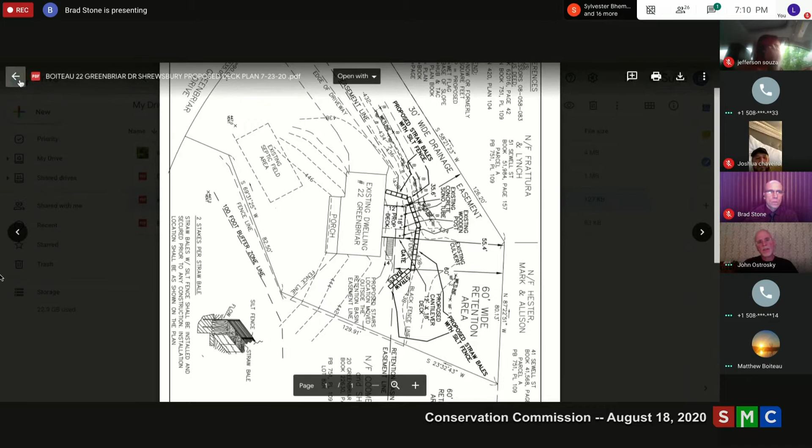Okay, and Brad's put up a plan here, sort of small on the scale. How close is it to the nearest wetland line? Can you tell? It's more than 30 feet. It's within that range. I'm not exactly sure what he had marked out back there. Oh, there you go, that's good. Yeah, there's that, that's a good shot right there. Yeah.

All right, let's go to some questions. Martha? So as John had asked before, the sonotubes aren't changing. You're going to just increase the size of the deck, but use the same ground support. Correct. Okay, that's my question. Thank you. Jason?

I'm all set. Bob? My only question is I'd like to pin down how close it is to the resource area. Brad, you may, I don't know if you have information about that, but it doesn't look to be 30 feet. I don't think it's 30. Let me just pull the plan back up again. Yeah, I wasn't sure if it was that 30 number. I'm just not, from what I was told, it's within a reasonable range.

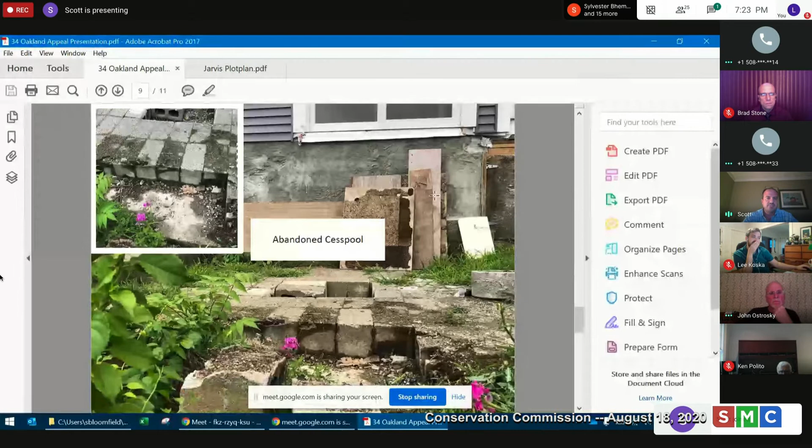So this is the back of the house. You can see the egress is here. There's 2 sliding doors that were here. This is the cesspool right here, and it extends out 11 feet, 6 inches, I think 6 or 7 inches, from the back of the house.

So the proposal is just to put the footings on the other side of that cesspool so it doesn't disturb it at all, and it stays there. You can see this is kind of the inlet picture here, where that cesspool is located. That's all been filled in - you can see the pea stone and the gravel there, filled in in favor of the E-One pump that's installed.

Now Scott, you were saying you can't put the deck footings on the cesspool area. What would be, I mean, if it's filled in with gravel, why would that be true? The building department said that I would need to, it'd have to go out, we'd have to dig down and put the footings inside of the gravel area, so you can't dig it out, it'll all have to be dug out. Okay, I don't think digging the cesspool is something anyone wants to do.

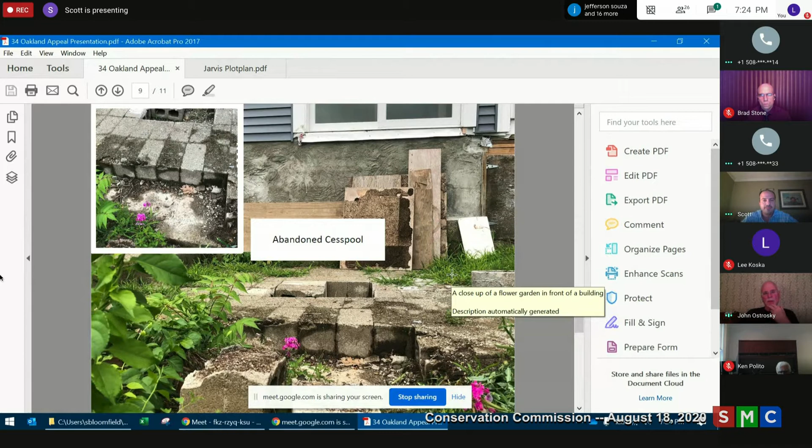And that's why you can't. Oh, you didn't pump it out ahead of time? No, it was pumped out, but it's a cesspool. I mean, it wasn't - I had it all inspected and they looked at it and we filled it all in. So it was all pumped out and everything, but it was still a cesspool.

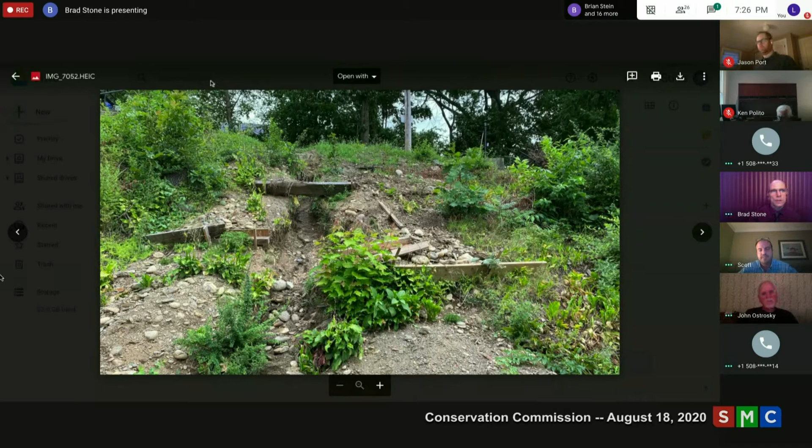Yes, I do. There's actually, they're going to put the rock walls in there. So what happened was when the trench was dug, when they filled it back in, there was a rainstorm that actually washed a lot out, so that all has to be put in. We're going to put two walls - there's going to be one up near the road to stabilize that, it's going to be less than four feet, so it doesn't have to be engineered. And then there's going to be one further down, and then what we're going to do is plant footing, like different shrubbery in there that's going to retain that ground that's in between the two walls. So that's the plan there.

Totally agree, this house when we bought it was really rough shape, and so we've been slowly chipping away, and that's actually in process right now, starting to look at that.

When was that photo recent? Yes, hold on one second, make sure. Yep, so that photo was taken earlier this month, sometime after I get your application. Perfect. Yeah, so within the next, I have a hard masonry place coming, actually looking at that, and they're going to put the rock walls in there and cement it and do it all and put the drainage there, so it'll drain.

Can you see what's on the screen, John? Yes. Okay, so Hickory Drive, there's the lot frontage.

This is all wetland through here. I believe the access, actually you can see it on the plan. Up here towards the top, it says driveway and utility easement. The driveway would be coming from Crimson, so that's why it has a Crimson Street address. That way you don't want to confuse the first responders, so that's why they do it that way. So it's got frontage on Hickory, but its driveway access is through Crimson.

Okay. And I'm sorry, would you mind please going through the plan of work again, because I'm not seeing it on the plan, and so I'm having a hard time following it. I just need to hear it one more time.

Okay, the deck is going to be 11 feet wide by 10 feet out, coming out from the back of the porch, and all the footing is going to be dug by hand, by shovel. Then the steel is going to have like a 30 foot setback from the setback line to the property line. I don't know if you have more questions.

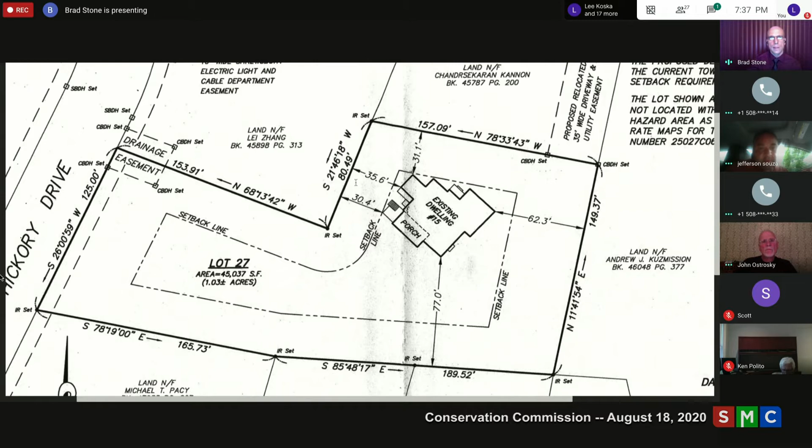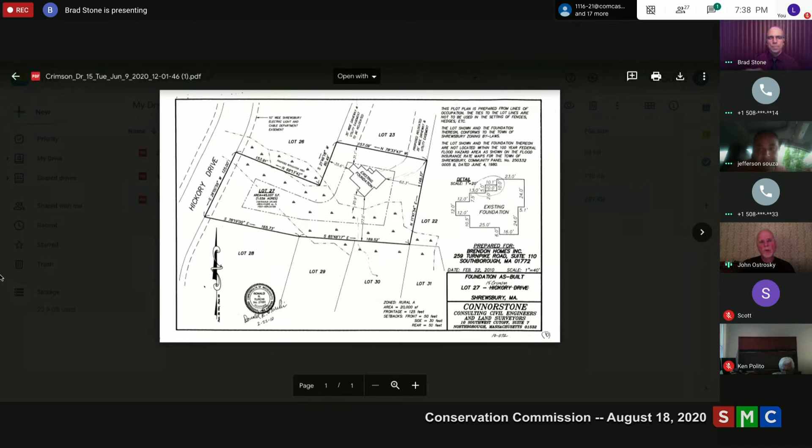Okay, sounds good, Brad. Jason? No questions. Bob? All set. Ken? All set. Brad, you're all set? Yes. Does anyone from the public have any questions or comments on this request for determination?

All right, I don't hear any. We'll close the hearing. Bob, do you want to make a motion? Yes, I'd like to move that we issue a negative determination with respect to this petition. Do we have a second? Second. Okay, all in favor?

We'll do a roll call. Martha? Aye. Jason? Aye. Bob? Aye. Ken? Aye. And John Ostrosky? Aye.

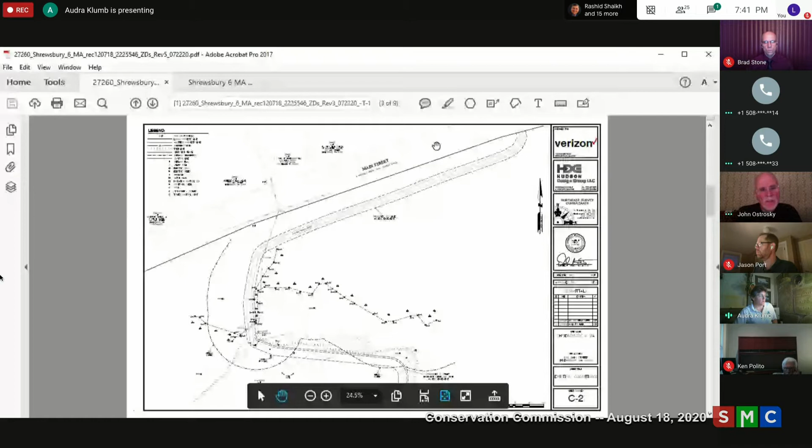Is that any better? No change. Oh, here it comes. Yep, perfect. Okay, good.

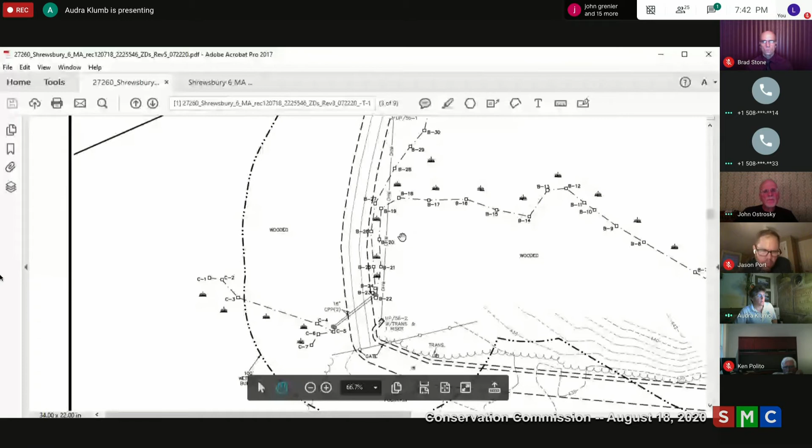At this point, you can see the wetland, the B wetland line is over here. It's wider, farther to the east, and it narrows down to a little channel—not really a channel, but a narrow passageway—before it joins into the culvert, and then crosses under the culvert.

It crosses under the culvert into the C wetland, and then continues westerly. The existing overhead utility line leads to an existing utility pole right here, and the proposal is to replace that pole and have underground utilities along the proposed access road through the field, along the side of the field. You can see the existing tree line there, and the utilities and access drive will follow along it and then turn south to go to the tower site.

We show the wetland buffer as the larger dashed line in this area. The impacts to the buffer will be for the underground utilities at the pole and through here, as well as the access road. Then there's a break, and it hits the buffer again in this area, then leaves the buffer at that point. Then it goes down to the tower site, and we're outside the buffer at that point.

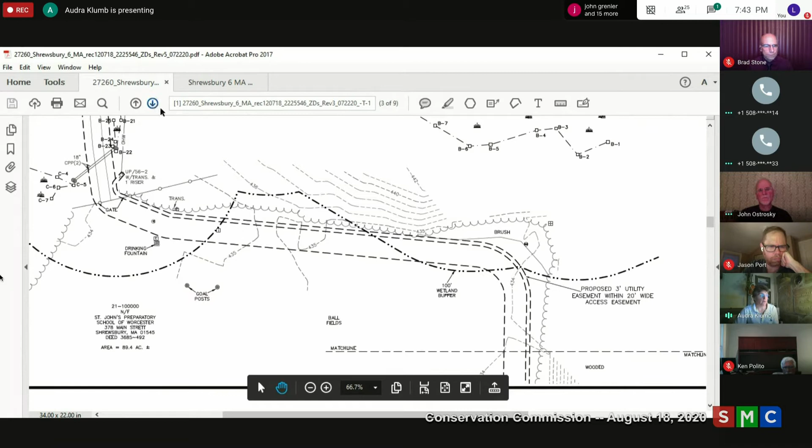I can show some photographs to you if you would like. Let's see. Everything runs a bit slower when I'm running a bunch of operations at once, unfortunately. It doesn't want—there we go.

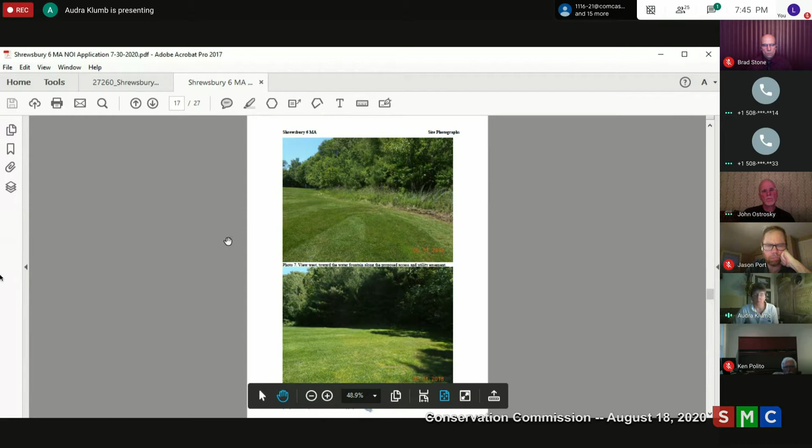That was the wetland section. So do you have any questions?

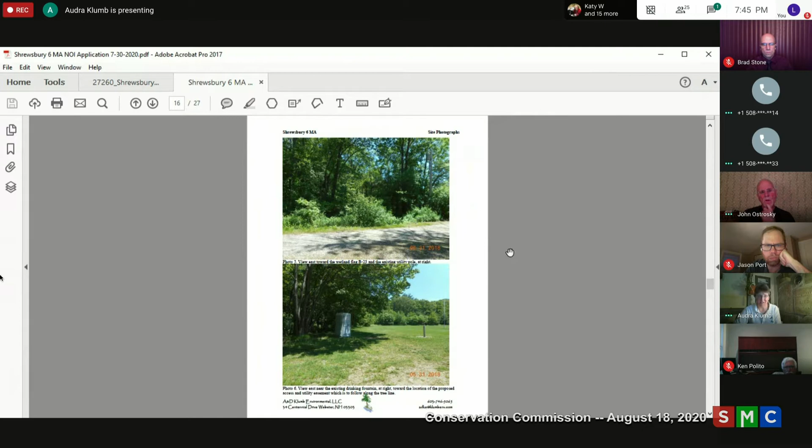Just when you're talking utilities, are you just talking about bringing power to this site with overhead lines? So the utilities would be the power, as well as, I believe, they run the coax through for the backhaul back to the... and I can have other folks speak to that who have more knowledge in that part of it.

Okay, I think we've got a couple of folks here. Dave, are you there? Yes, I'm here, this is Dave Tibnan. I'm the real estate consultant for Verizon Wireless.

So we'll be running both power and fiber from that pole that we're replacing, proposed to be underground all the way to the tower compound. Okay, so from the pole it goes underground. Correct, and it's both power and fiber.

Okay, Martha, do you have any questions? It looks like some of the access road is built—will you be building additional roadway? Yeah, where I show, there's existing access to the field right now, but there's no access road around the field to get to the tower site.

So from once you get onto the field, that will be where the access road is constructed around the north side of the field, then the east side of the field down to the tower site. And what will the surface of the road be? I think it's proposed as gravel. Gravel, okay. And when you're installing the utilities close to the tree line, how close to the tree line are you going?

This is Dave Tibnan again. I don't know if Jose is on the line.

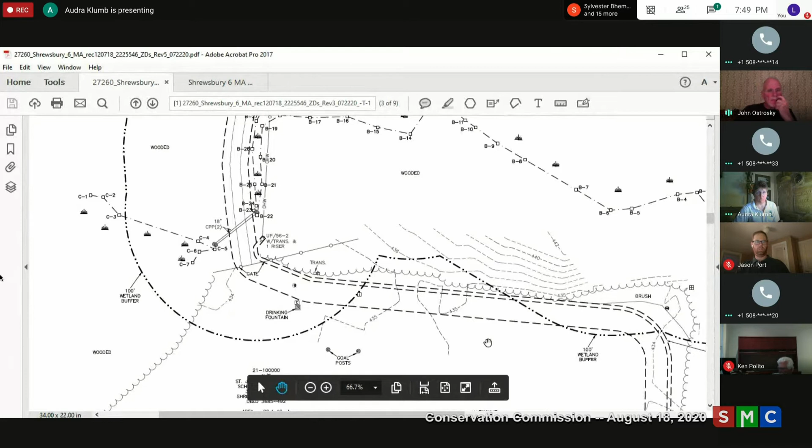My questions have been answered. Okay, yeah, I've got a question on that road again. We talked about the gravel road initially, then went over to the grass, using the grass surface. Once a month access, what happens in the winter and spring when you have less than favorable ground conditions? What kind of vehicles are you bringing in there to check this, or would you be walking in at that point?

I'm not sure what kind of equipment you need. The cell techs do drive four-wheel drives, but they'd be hiking it. I believe that gate's going to be locked and closed once the site's built. A lot of the newer sites Verizon Wireless is now constructing, most of the upgrades are actually done remotely, and they're also monitored remotely. So the site visits, which used to be once a month, will probably be much less common going forward with a newer site like this — it might really be once every 6 months, is what I should have said.

Okay, and they could walk in if conditions are unfavorable, it sounds like. Absolutely, we have sites that are on mountains with limited access — no access whatsoever in the winter. Right, and what kind of height are we talking about for this tower?

We haven't gone to the planning board yet, but we're proposing 120 feet high. Okay, because you're pretty much at the bottom of the hill at that point, so you don't gain any natural elevation with that location. True, but that 120 feet will still work for them then. That's correct. I'm not an RF engineer, but height's not everything.

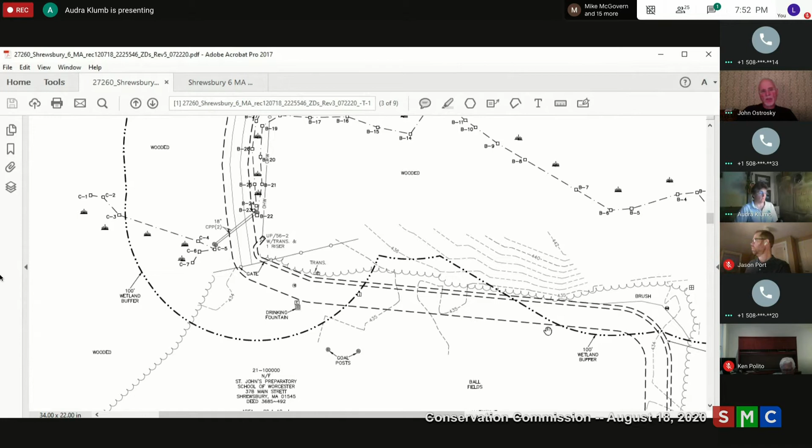Oh, okay. All right. The actual building for the tower must have some structure to house some of the equipment — just out of curiosity, I know that's not in the buffer zone. It doesn't look like it from the plan, it looks like it's out of the buffer zone.

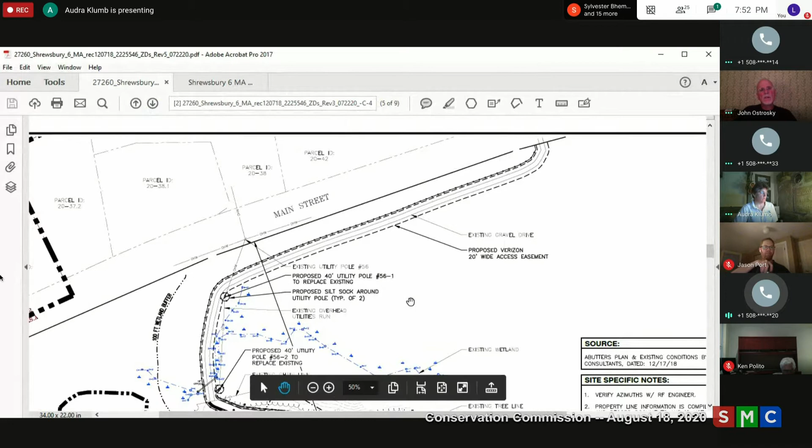What size and type of building do you guys usually have for this kind of installation? Our newer macro sites just have outdoor cabinets that look relatively much like a refrigerator. I think we just... I'm sorry? We have a plan up here but we're losing your audio. Go ahead, Rich, you're clear now. The newer sites generally have outdoor cabinets, so we don't put the buildings like we used to.

Oh, okay. The transformer pad — a transformer pad, perhaps a generator, and some outdoor cabinets which look like refrigerators. Yeah, okay, that's interesting. All right, Brad, do you have any comments?

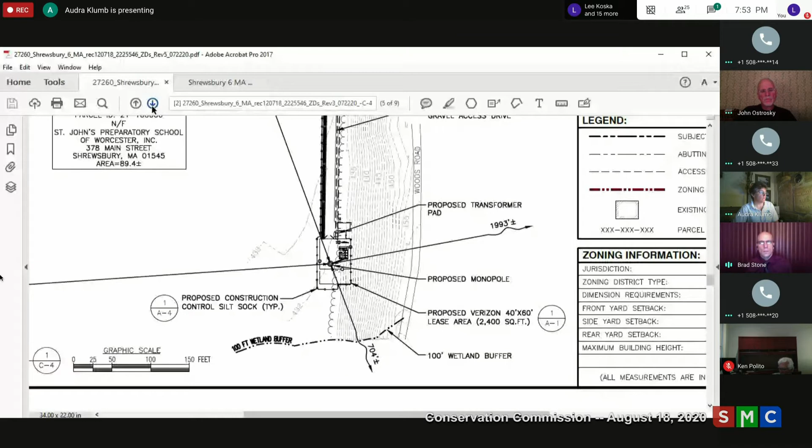So a few things. The first one is I don't think we've received a file number yet from DEP for this. So I would recommend keeping this open until we've got something from them. Because recently we have been getting a lot of comments from them. So it would be helpful before we try to make any decisions that we've at least gotten the file number and comment sheet from them.

The other thing I was going to say is I had not had time to go entirely through the stormwater report. And I do remember looking at the plans and seeing the gravel drive and some of the components like the bioretention swale, things of that nature. What I'm hearing tonight, though, is that it's not going to be a gravel drive. It's going to be grass.

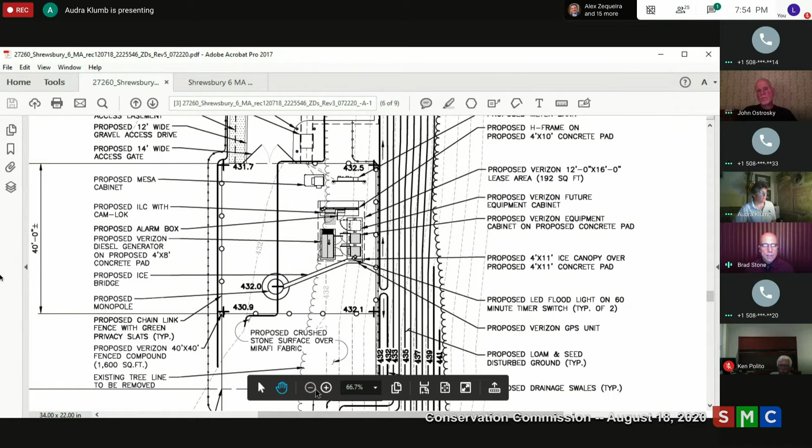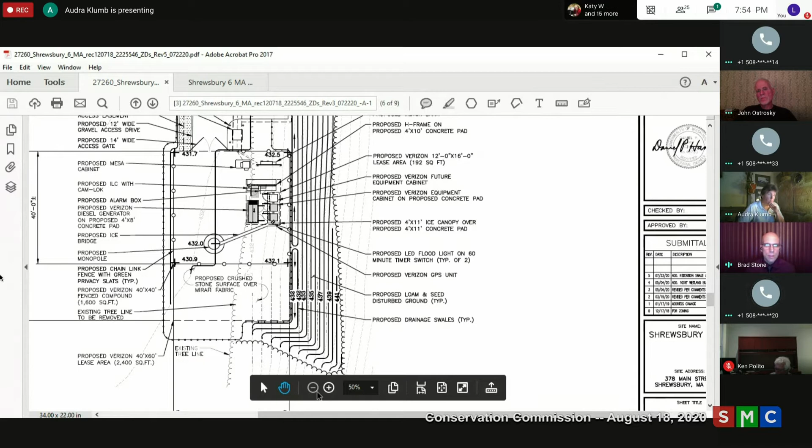What I would suggest is any of the changes from what we have in front of us now, revise the plans and present them to us before the continued hearing, for instance, and that way you could finalize the decision on what you have in front of you. I just don't like to condition something that's not on the plan sheet these days. We're running into problems with that. So if it intends to be grass, it should be shown grass, and then any modifications in addition to that, something that might impact the stormwater report, for instance, should be reflected there as well.

Okay. Other than that, I'm absolutely thrilled that this location compared to, for instance, crossing Westbrook across the street. So I'm much more excited about seeing this here.

Okay, no, that's good. And, great, thank you.

And when those plan revisions get made, you should get them to Brad as soon as you can, prior to the meeting. Will do. And also get it over to DEP too, because they do a co-review, and you don't want them looking at the outdated plan and making comments. That would put us off another month. Yep, we'll do that. Thank you.

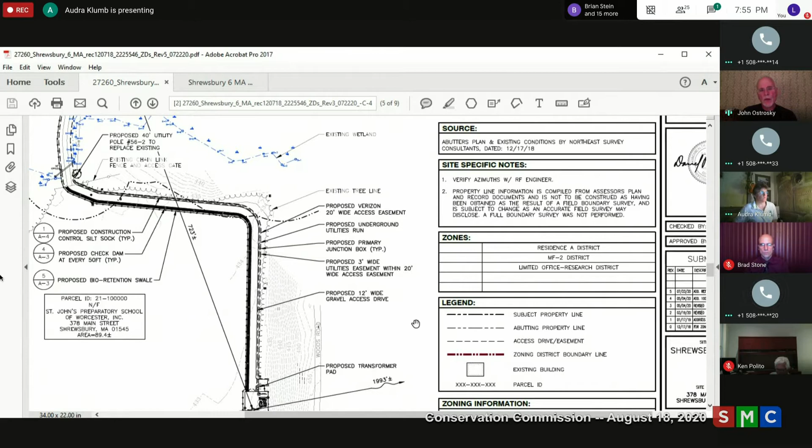All right, let's see if there's anybody in the public with any questions or comments tonight. Do we have any questions or comments from the public? I don't hear any, so we will continue this hearing until our next meeting, which will be September 22.

Okay. Okay. All right. Thank you. We'll see you next month. Thank you. Yep.

Martha, would you please read the notice: Notice is hereby given in accordance with the provisions of General Laws, Chapter 131, Section 40, that 6 Kings Point Drive Realty Trust, 180 Barstow Lane, Tolland, Connecticut, 06084, has filed a notice of intent for the demolition and reconstruction of a single-family house, retaining walls, and associated site work at 6 Kings Point Drive. A public hearing will be held on the above notice at 7 p.m. on Tuesday evening, August 18th, 2020.

All right, John, are you presenting? Yes, I am. Thank you, Mr. Chairman. On behalf of John Salem, I am presenting a notice of intent for, as was stated in the notice, the reconstruction of a new house located at 6 Kings Point Drive. 6 Kings Point is off of South Quinsigamond Ave. It's a peninsula that runs to the south off of South Quinsigamond Ave, and it's the last lot on Kings Point. As it's a peninsula that kind of juts out into the lake. It's a 19,000 square foot lot.

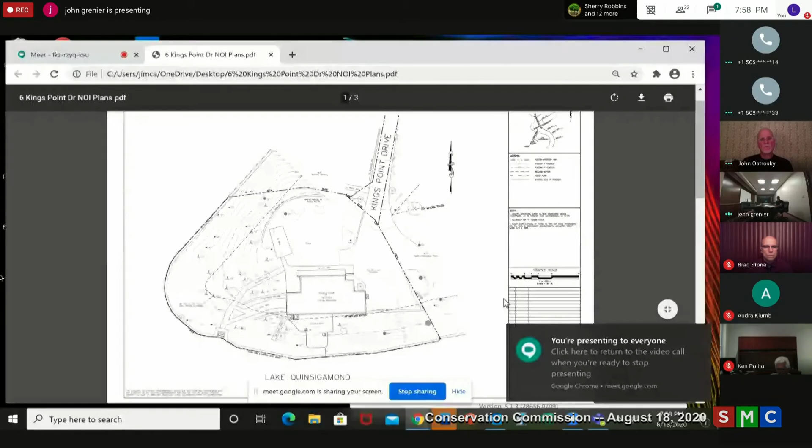I think I can, if I present, I can. Okay, can everybody see that? Not yet. No. It should come up any second now. Let me know when you got it. We don't see anything yet, John. I have to hit share, I believe. Would you like to? Oh, there we go. It was being a little finicky on me. How about now? Yes. Okay, great.

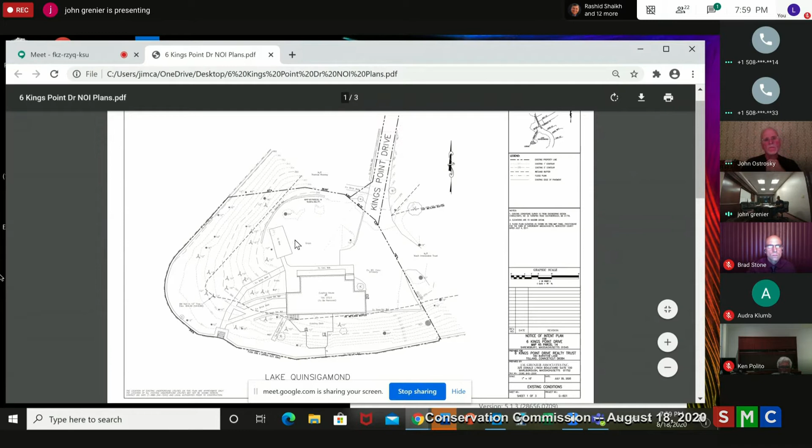Again, this is the southernmost lot on Kings Point Drive. As you can see, it runs like a peninsula out onto Lake Quinsigamond. It's a 19,000 square foot lot. This was the home of John Salem's parents. As you can see, this is where the existing home is on the lot now. There is an existing deck that is at the southerly point of the lot that is right on the lake, and it's about 7 feet. The edge of the structure for the existing deck is about 7 feet off of the edge of the wall on the lake. The existing home is also serviced for sewage just right now by a cesspool. They did extend sewage with force mains onto Kings Point for all of the other lots, and there is a stub located right in this area so that any new home can be tied in.

There's no stormwater management at all on this existing site. Anything that runs off of the existing driveway runs down towards the lake, and anything off of the house runs onto the lake.

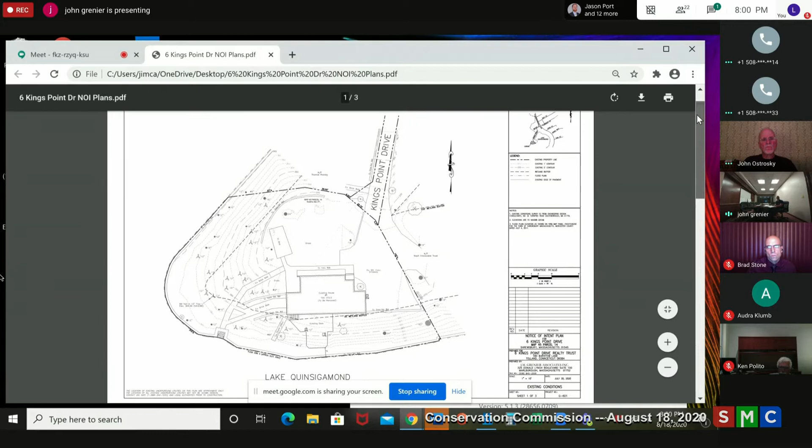So what we are proposing is Mr. Salem is proposing to construct a new home for himself, approximately in the same location as the existing home that was there. It's a non-conforming lot because, as you can see, the shape of it doesn't have adequate frontage. He was also before the zoning board to get relief for offsets for yard setbacks.

A key factor in the location of the new home was trying to maintain similar offsets to the abutting properties. To the north are the Roonies, and to the east are the Knolls. It's fairly tight down there, and everybody can kind of see each other, so he's trying to maintain some of the privacy that is currently there now.

With the new home, access would be off of Kings Point. There's a driveway and parking area located right here, a 2-car garage on the easterly side, and the main house would be located here.

For stormwater management, we would be capturing all of the roof runoff and putting it into a series of recharge chambers — just like every other lot on the lake, it's good sands and gravels. We'd capture the front portion of the roof, putting it into downspouts and recharge chambers in the front yard, with another series in the rear yard. On the easterly side behind the garage, we'd capture a small portion of the garage runoff into another chamber.

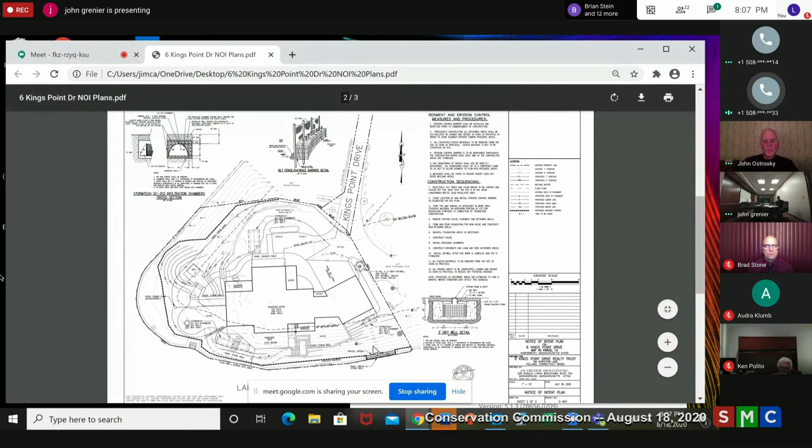So John, I'm always looking at this from the perspective of wildlife accessibility, and this is a significant amount of lake frontage here. Can you tell me more about that gravel apron? You said it would lower the wall, but what would be the final height of the wall in that area?

Well, Martha, originally I was anticipating they were going to remove that section of wall, but in further discussions with my client, he's going to... right now I'd have to look at the elevation of the lake, it's about 358.6, that's the flood zone elevation. The top of the wall is somewhere around 361-ish, so you're looking at about three feet or so. So he'd probably bring that down a couple of feet.

So he's not going to remove the wall. In our further discussions, he's not going to remove the wall, but he is going to lower it just so he doesn't break his back when he tries to bring in the boat lift at the end of the season. So there's going to be a drop in the wall, but he's not going to remove the wall.

Okay, well it would be nice. I like the gravel apron idea, just because it does give some accessibility and it'll be easier for him to get things in and out of there too.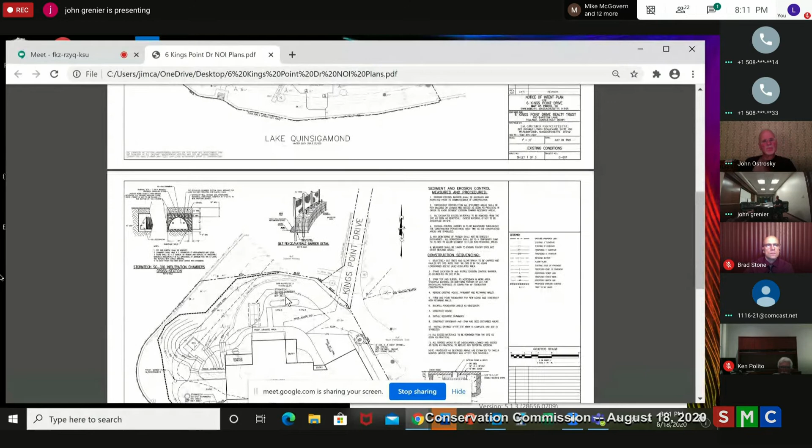So we are reducing the area of the driveway because it's only this area right in here. The footprint of the garage is pretty much in the same area where the paved driveway is, and of course there are some patios and whatnot. So in my estimation there is a bit of an increase, but I don't think it's significant. Again, we're capturing all of the roof runoff between the downspouts and the driveway, and we're recharging all of that into the ground.

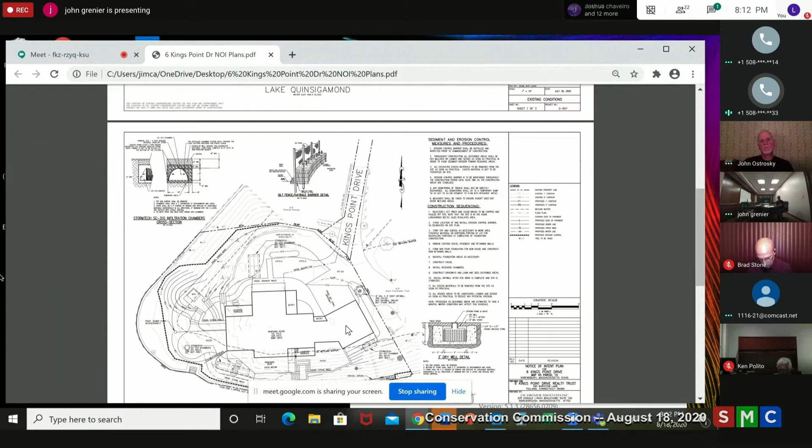Okay, and I was taking a look at your landscaping plan too, and I just want to note that typically I don't see annuals listed on landscaping plans, and you've got some beautiful wave petunias in there, which are not perennials.

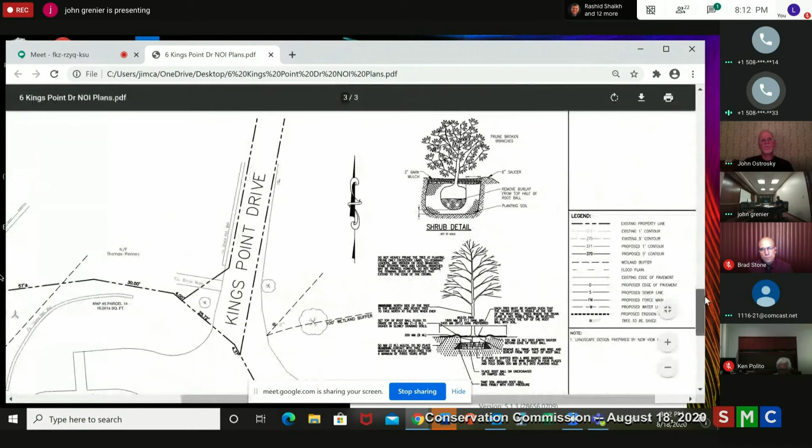So just so nobody's expecting that they're not going to have to plant some more flowers, I've got a list here of plantings that includes 352 plants. My discussion with my landscaper was, is all of this a perennial, coming back every year? So we're only planting once and maintaining.

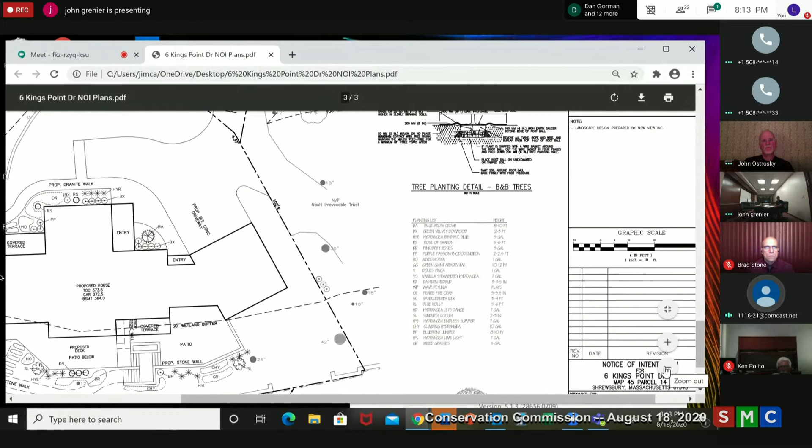But I think what her point is, the wave petunias might be annuals. Oh, there may be some, but this is going to be as low maintenance and as natural a landscaping plan as we can make. Yep, and most of them are that, but just don't expect your petunias to last from one year to the next. You need to talk to my wife on that. I think she knows what I'm talking about. Yep, understood, she does.

All right, thank you, I'm all set. Jason? I don't really have a question at this moment.

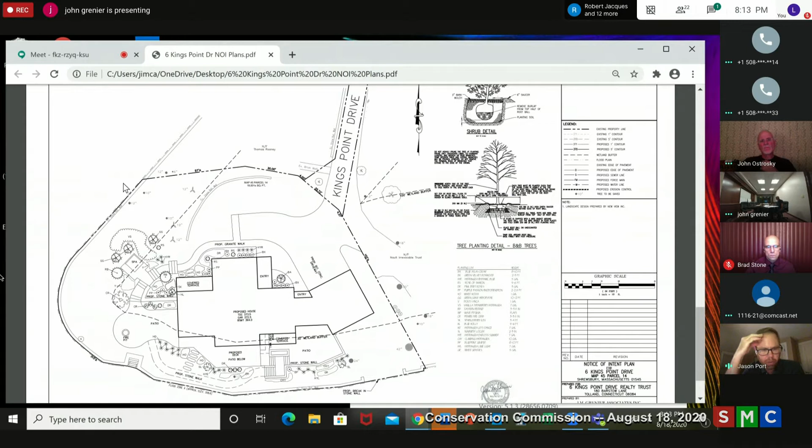More of a concern, somewhat following up on Martha's question, the amount of impermeable surfaces. I don't know if, John, I understand what you're saying, but I don't think it's a slight increase looking at the plan. I am generally concerned about the amount of work within the buffer, including, I don't know how many square feet of the house is going to be sitting in the buffer, but I have a general concern about the amount of work that's going to take place in the buffer and the house being in the buffer.

But we shall see what other members have to say. Do you have a question, Jason? No, I have no question.

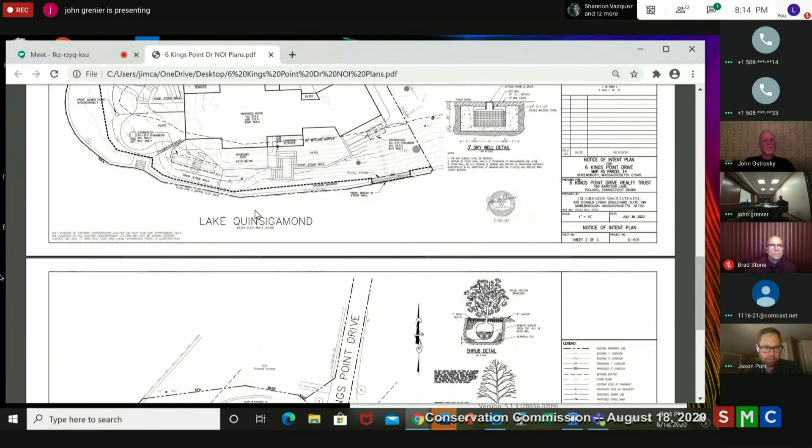Here's, if I could add to this: this house was built in 1964, and there are no rain gutters, no sewer. You're talking gravel bank and pea stone at a fairly steep grade. This is the existing house that drains down basically to the water. What we are going to do, with your permission, is manage all the stormwater. We're actually lowering the grade significantly of these gravel banks and planting — we have a significant landscaping plan to capture and prevent all this water drain off. When you look at where we're going from and to where we're going, it's going to be a big improvement.

There are going to be some concerns, but we've got a builder who is highly reputable, and we're going to do everything to abate any kind of runoff or water during the construction process. John can grant you that. And I appreciate what you're saying, I do.

However, you're still building a very large house and doing a lot of work within the buffer zone. So while I appreciate you saying you're cleaning up the site and mitigating some runoff, you could do all that without building a house that goes within the 30-foot buffer. We're building out all these patios. Again, I don't have a question, I'm just generally speaking of a concern that you're doing a whole lot of work within the buffer and placing your new house in the buffer.

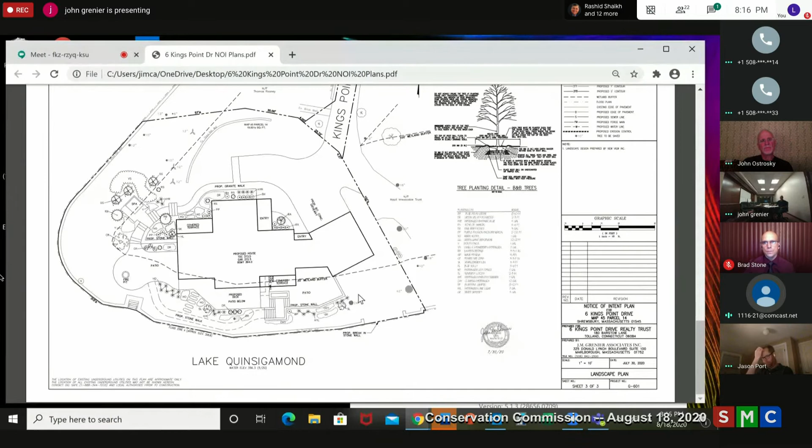Mike, are you on? Mike McGovern, I don't know if you want to comment about that. We can't push it if we go into the buffer. Yeah, I mean, I could certainly address the way I addressed this with zoning when they approved this plan, as to why the house is located where it is.

If this would help, Jason, could I address why the house is located where it is? Well, you can, but it's still not going to address my concern, right? The concerns of zoning are not the concerns of the Conservation Commission. They're completely different. So Jason, let me just jump in here for a second.

I think I hear what you're saying — you're more concerned about the overall size of the new construction versus the replacement. The old house was significantly smaller, you're saying, in terms of disturbance to that peninsula. Well, yes, I think, John, that is a very fair point.

I think the amount of work within the buffer and the placement of these additional structures, impermeable or not, within the buffer, and the house now in the buffer, is a sizable disturbance across the entire peninsula. Again, I appreciate what the owners are trying to do by cleaning up the runoff, but this is a sizable project, and a good chunk of it is taking place in the buffer.

John, Mike McGovern, I was asked to comment. Go ahead. I do agree there are sizable impacts, but there's a lot of pre-existing conditions to consider.

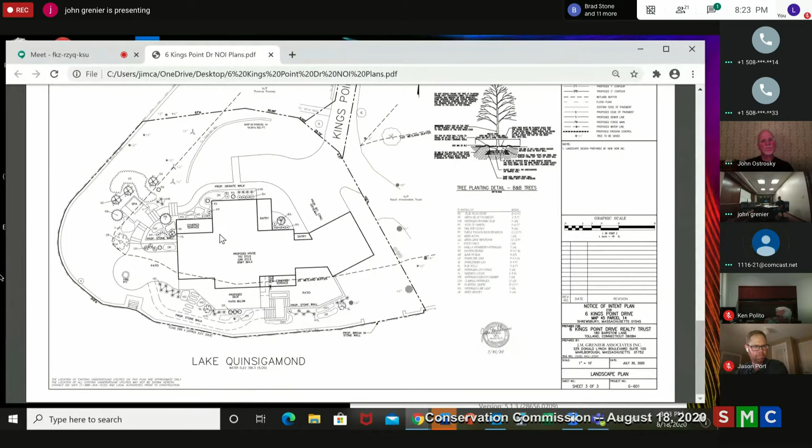I'd like to briefly address the size and design of the house. Just to reiterate, we are moving the existing deck back about 7 feet, so at the point closest to the water, we're actually moving the house back about 6 or 7 feet. A lot of planning over the past year has gone into the design of this house, and the reason it's placed where it is - slightly over the setback in some areas - is because we're trying to compromise here.

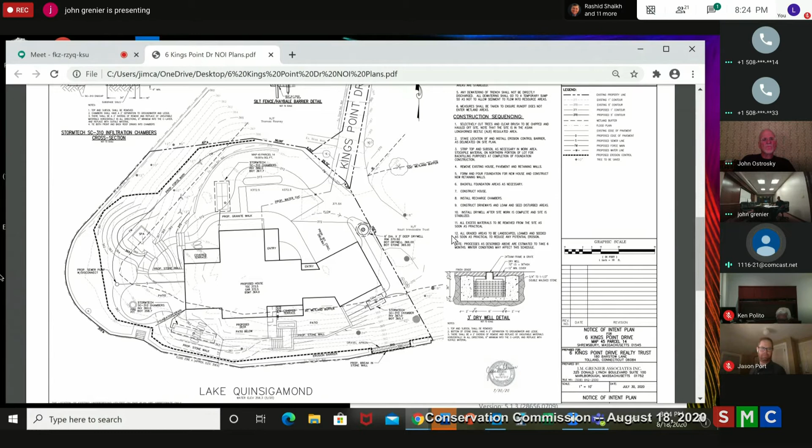We're moving some of the farthest points closest to the water back, trying to come up with a plan that works with all the neighbors. If we move the house to the north or northwest, we would be in the setback with the garage, in the setback to the neighbors to the east and north. And if we move the house further back to the north, you have to understand the terrain - the house to the north of us, the Rooney's, is another non-conforming lot that is right on top of my property line. In some instances their house is 4 feet from my property line.

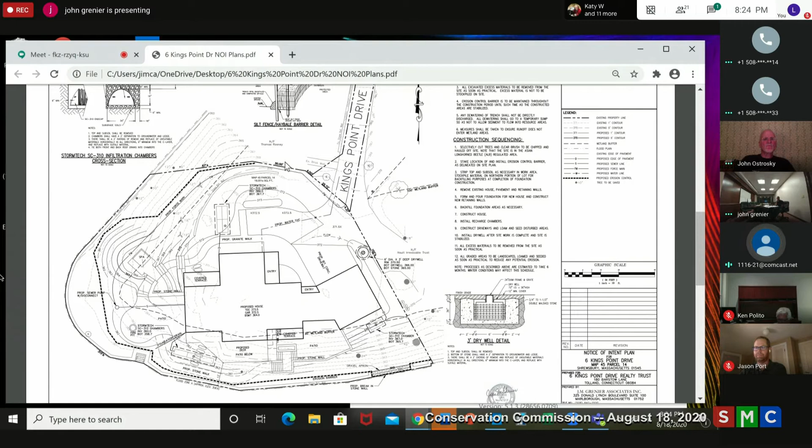So if we move the house to the north, our house is elevated and their house is lower, and we would be looking right down into their patio area. We want to maintain a green buffer between the two houses. We want to maintain some privacy, and that's why you see a couple of areas in the south outline going over the setback area.

The other thing we wanted to keep in mind is the house has an elevator, and by having the addition to the west, the elevator brings us down to the lower floor and gives me better access to the lake. As years go on, that elevator and access to the waterfront from the southwest would allow me, with any troubles walking, to still get there. So that's kind of why we set it where it was.

If you looked at the lot, you would notice that any movement to the north would eliminate a green buffer between us and the Rooneys to the north, and also eliminate any privacy, where I'd be looking right down on their patio. Again, you've got two non-conforming lots, and the non-conforming lot to the north is much closer to the property line than I am to the property lines with any of my proposed plans.

Thank you. Any questions? Ken, are you all set? Yes, I'm all set, thanks. Okay, Brad?

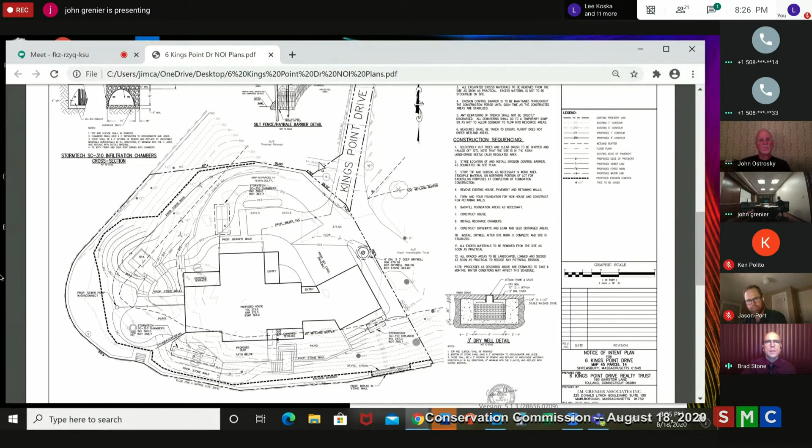Can you hear me, John? Yep. Okay, so just a few things. First of all, this is another project that we don't have a DEP file number for yet, so I would caution not to close this one tonight for that reason as well. Comments on the plan. John Grenier, can you stop sharing so I can bring something up, please? Oh, sure, thank you. Is that good? Yeah, thank you.

So that should be reflected and updated in the notice of intent if necessary as well. I would want to see really detailed specifications of what's planned to be built for the new wall, as well as how that additional item mentioned would be placed and removed seasonally above the wall. I also want to see details on the other proposed retaining walls. And I believe I heard that the patio was going to be porous, so that detail should be added to the plan as well. Those were really my concerns. I think everybody else has already touched on the 30-foot limit, but other than that, I'm all set.

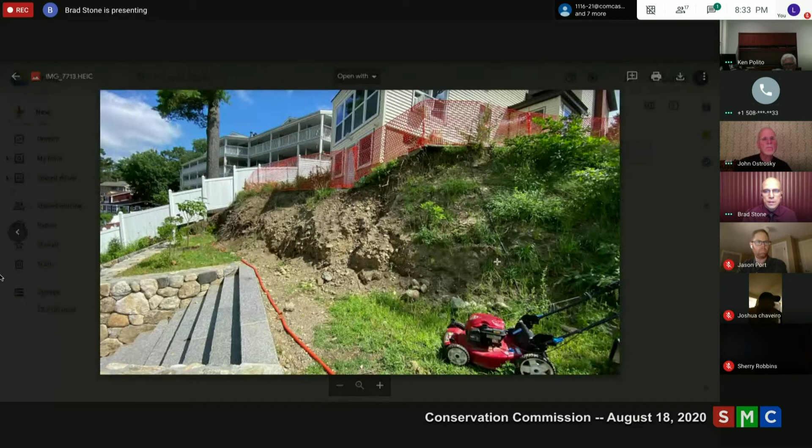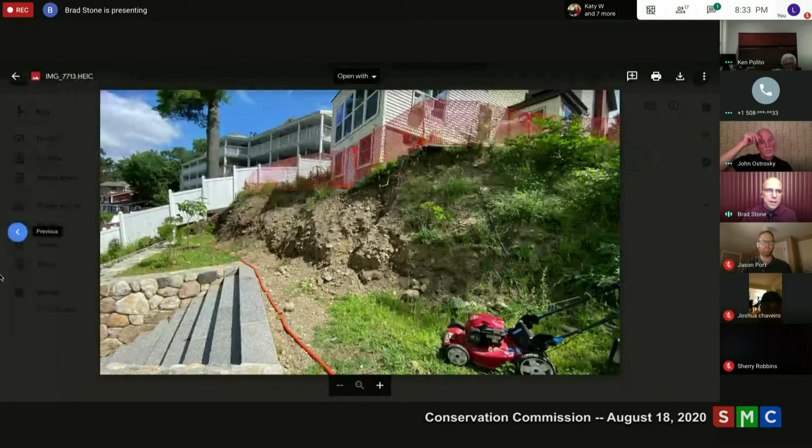There's a closer shot of it right there. So I'd be pretty hesitant about closing out an order with something that looks like this. The other question I had, a couple of things with the site: the certification letter we got was really just for the wall location. We got a letter from the consultant that basically said the walls were constructed according to the plan, not the overall order of conditions that we normally look for.

One of the things I did notice, some plantings were done. I don't know if all of the ones required on the plan set are there. You can see a lot, some at the base of the walls. There were some trees planted up in this area. The plan specified quite a number of plantings. I wasn't here for that proceeding, so I'm kind of looking at it after the fact, but we'd have to verify that everything's in place that was on the plan as well.

The owner, I believe, is present at this meeting. The other concern I had would be whether or not they intend to go ahead and replace that home, because if that's the case, you'd certainly want to keep the order open at this time. If not, if the home is intended to remain there, then really the outstanding issue is to verify that the plantings are there and what's going to happen with this exposed dirt that's still there, because I think that should be addressed before the commission issues a certificate of compliance.

Is the owner present here? Yes, I am. Is it your name, Joshua? No, actually, I'm using my son's email address, my name is Riznardo Chaveiro. Okay, can you clear up some of the questions Brad has relative to what's the final plan for all the earth at the top of the upper retaining wall, and also what's your intent with the home?

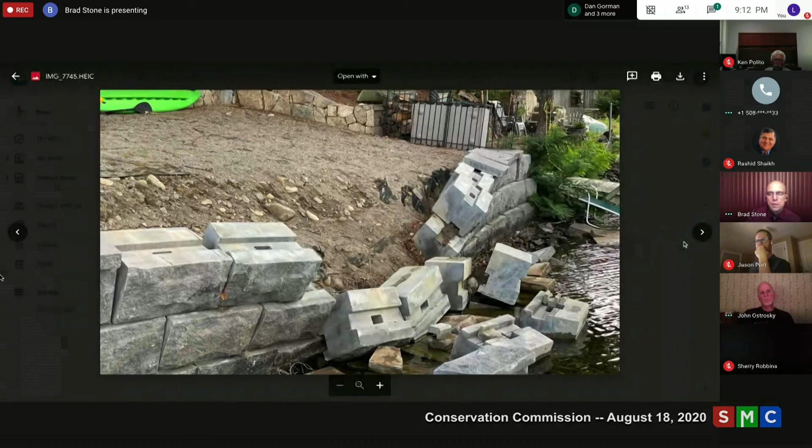So here's one shot of it. You can see the material behind it is very loose and granular. What I'm finding is that in some of the other blocks, with the joints, they're continuously losing some material as well. So it's not surprising from the looks of it that the material behind it has moved and will continue to do so.

The wall, I didn't measure it at this point, closer to where it was safe to be near the entrance to one of the docks. It's close to 5 feet high from the top of the wall to the ground below it. And then of course you add whatever depth of footing is beneath that for the total wall height.

Here's another picture of it. There's some erosion rills up in here that are continuing to happen as well. So you can see some of it here. It looks like it's still going to be active in this area.

There's a survey stake up here towards the top right. When you look at the joints in the top of the stones near the wall, you can see some material has started to move near those joints as well. So even though the owners approached us about permitting many months ago, they hadn't gotten to that point yet. It looks like some consultants had been on site in preparation for that — I'm speculating based on the survey markers and things that are there. But more importantly now, rather than try to get a permit, I do think some immediate work needs to happen there.

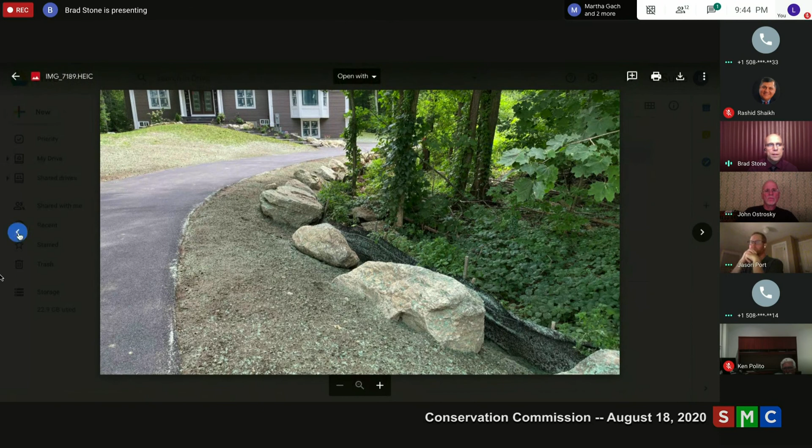There's around the corner heading towards the street a little bit. So it's the boulders as you head towards the street are a little bit more pronounced. And then as you head towards the back of the property, not as much. So...

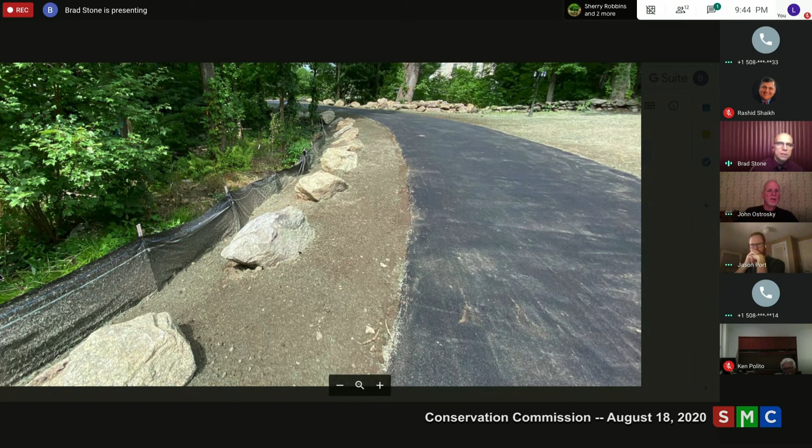Kind of what I think this was really the outstanding item in terms of what needed to be done in the more immediate future. The other thing was monitoring the replication area. But if the commission decides they still want that fence and vegetative barrier, or if the boulders are sufficient, we can let the applicant know, and actually he may still be at the meeting at this point as well. So I'll just open that up for discussion.

All right, Martha, you want to start? What do you think? Well, Brad, first off, what did the order call for? Call for the boulders? Well, the order called for them to submit us the detail for that. So it was the boulder, vegetative, and fence barrier. We never got that, and that was part of what the enforcement order was for.

Since then, there was an updated plan, not part of the order, but there was a plan that was presented that showed those things. And then at the more recent meeting, the question was brought up by the applicant: would the boulders be sufficient, or does the commission want more? So that's why I went out there to basically view what was there, provide the commission with pictures, and if you think that's great, great, and if you think you want more, tell them you want more. All right Martha, what's your opinion?

So the idea of the boulders would be that they would delineate the wetland area from the driveway and keep them separate? It'd be more of a permanent delineation of where the wetland is, to keep them from encroaching, moving it out. It's just like that prior site we looked at. We had arborvitaes alone, and they went and cut the arborvitaes down. So the boulders are more of a permanent type of barrier, but I think we requested the other items because we wanted a further barrier.

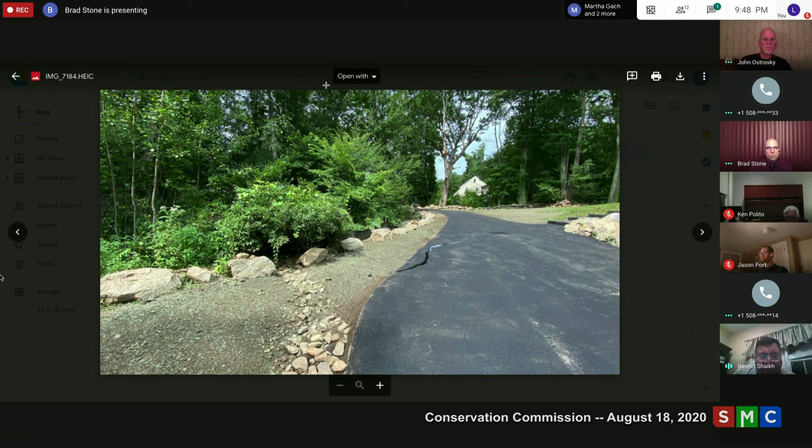Mr. Chair, I do have more recent pictures with more growth on it, if you like. For what are you talking, for the replication area, Rashid?

For the whole area. I don't know when Mr. Stone went there, but I took some pictures today, and it looked really beautiful because all the grass has grown. We had extensive discussion last time, and I think the board decided the boulders are pretty big and a nice size. Actually, in the back, the boulders were only required up to flag 19, but we went further and had some relatively smaller boulders too. We had huge boulders we bought, we went all the way to 19, and then had more boulders which we placed around that area too.

But anyway, I do have more recent pictures if you'd like me to show you. Last time we discussed and agreed we did plant the trees, but you guys want to see the growth. I have conveyed the property already, but I made the new owner sign a document that they will water all the area, so we don't have these new plants die on us. They will be doing that, and I know we had a monitor. But anyway, we had extensive discussion, and those plants were planted.